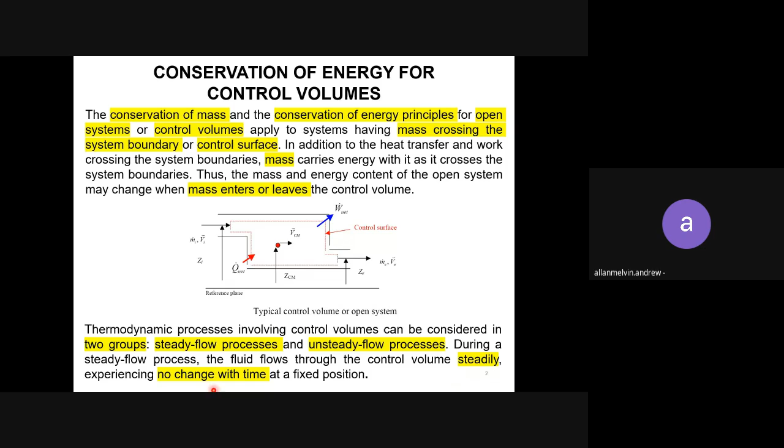An unsteady flow process means from point one to point two, within inlet to exit, you have a few points with different velocity or different mass entering. During a steady flow process, the fluid flows through the control volume steadily, experiencing no change with time. So if the flow is steady, meaning no change with time.

Let's review the concept of mass flow rate and energy transport by mass. One should study the development of the general conservation of mass presented in the text. So the first thing you need to understand is mass flow rate.

Mass flow through a cross sectional area. So mass flow rate is actually mass flow through a cross sectional area over time. Over time we are taking the integration. This is the formula.

So m dot, normally mass flow rate we will write as m dot, with the dot on top. Note that the dot over the mass symbol indicates time rate of change. So when you have a dot, it means it's related with time.

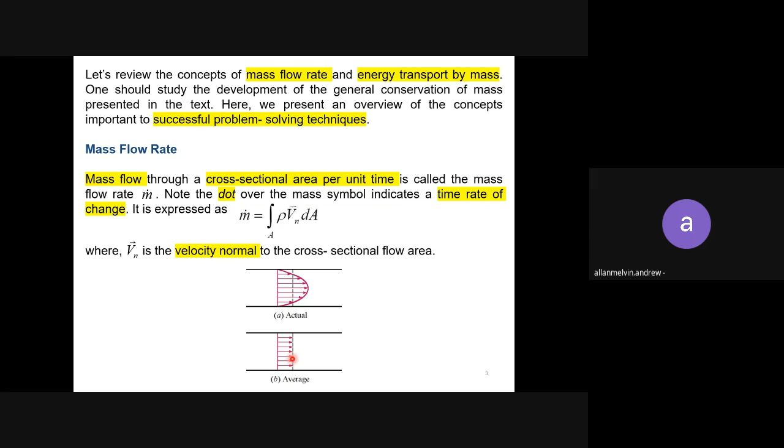You can see in the picture this is the actual velocity. How will the actual velocity be? The one nearer to the surface will be almost the same, it will be hard to move those molecules, and molecules at the middle will move more. So in the actual situation, the water or mass will be flowing in this way. But for calculation, we will take the average of all these lines, and then we get this. It's easier to do calculation this way.

So this is the formula. If the fluid density and velocity are constant over a flow cross sectional area, the mass flow rate is calculated by taking into consideration the average velocity, not the actual velocity. So m dot, our mass flow rate, equals rho times average velocity times area.

So you can use this formula or this formula, these are the same because this one is derived from this pipe.

Okay, so you can get this. Density is 1 over V, so you can convert it into this form, depending on the information given in the question. Later we will see a few questions, then you can understand how we can use this. I will give an appendix of formulas for your final exam. Some of the formulas will be appearing in your exam question at the appendix section.

The fluid volume flowing through a cross sectional area per unit time is called the volume flow rate. Earlier we saw the mass flow rate. So there's another thing called volume flow rate, which is the fluid volume flowing through a cross sectional area over time. The symbol is V dot. V dot, volume flow rate, equals to the average velocity times area. The relation between mass and volume flow rate is m dot equals to rho V dot, or equals to V dot over V, where v is the specific volume.

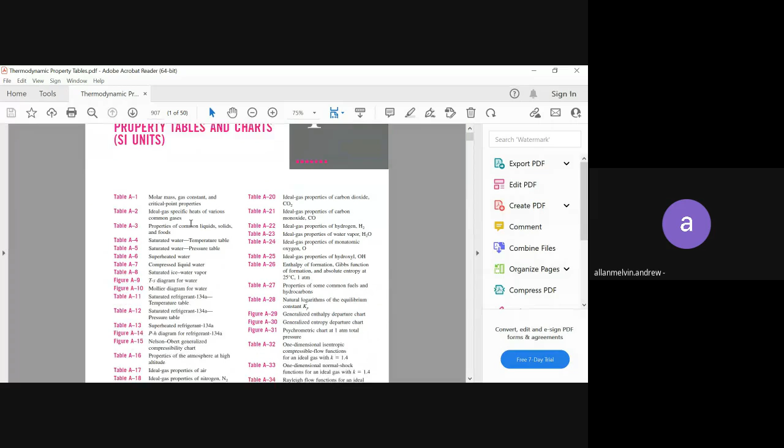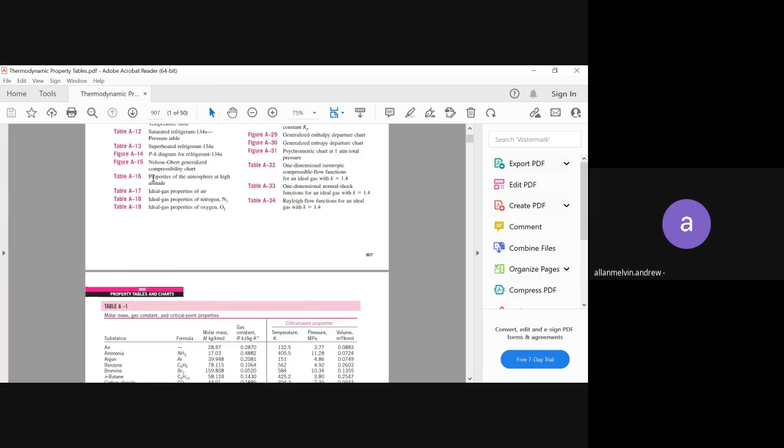This is your thermodynamic table. You have a few tables, so just find which one is related to ideal gas. Normally for ideal gas, we take from table 2, table A2. Not table A1, go to table A2. This is table A2.

Earlier we mentioned that it's air, and we assume air as ideal gas. If you want to find the gas constant, just go and find what is the value of R. In this table, for all the gases, you have the gas constant R, and also Cp, Cv, and K. In this case, we want to find the value of R for air, so the value is 0.287. That's how you can find it.

If the question mentions nitrogen, you just go and find the value of R, which is 0.2968. Normally we won't ask about weird gases, so it can be either air, carbon dioxide, helium, hydrogen, nitrogen, oxygen, or it can be steam. Steam also can be asked. For steam, the gas constant is 0.4615. So this is how you can check for the value of R from the thermodynamic table.

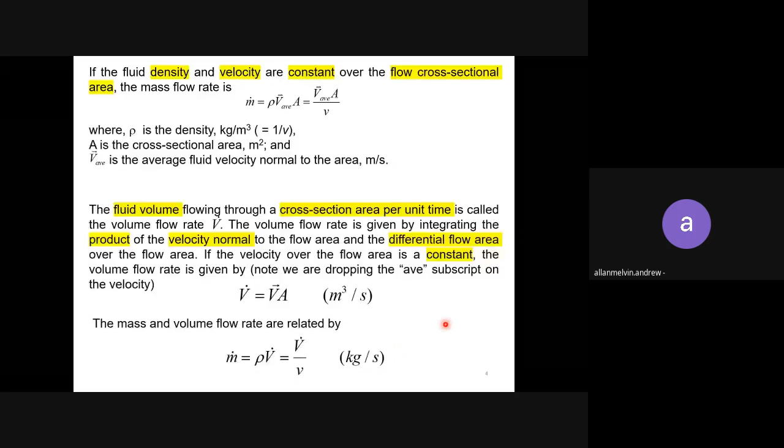But the question asks you to find the mass flow rate. So mass flow rate you take from this formula, the relation: M dot equals to V dot over V.

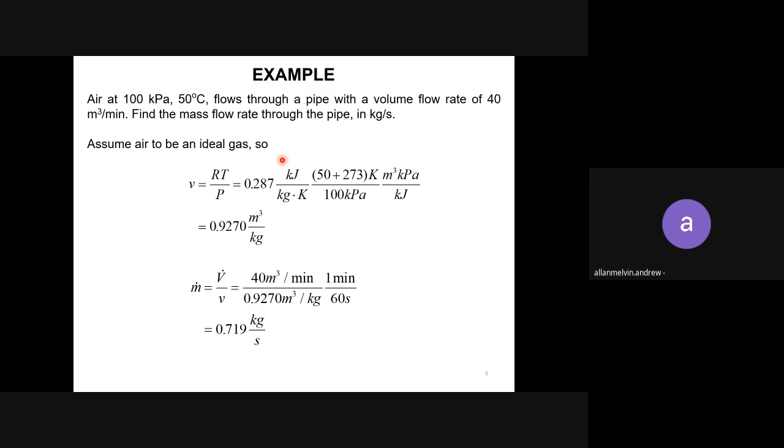So here we know that the volume flow rate is 40 meter cube per minute. And V equals to 0.9270. Once you solve this, this is the answer, 0.719 kilogram per second. So that's for the example.

So conservation of mass for general control volume. The conservation of mass principle is: sum of the rate of mass flowing into control volume minus sum of rate of mass leaving the control volume equals to the rate of change of mass inside the control volume. Or we can write it as: sum of mass flow rate in minus sum of mass flow rate out equals to the changes in the mass of the system.

Steady flow process means the energy conversion device operates steadily over a long period of time, let's say 1 minute, or it can be 1 second or 1 hour. So the flow rate is steady, meaning it's not changing. So the rate of heat transfer and work crossing this control surface are constant with time. It will be easier to calculate when the process is steady flow.

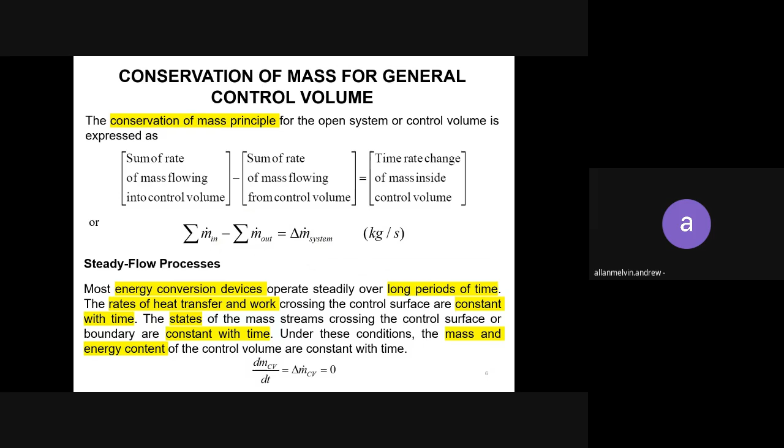In steady flow, based on this formula, there are no changes in mass, meaning the mass flow rate in minus mass flow rate out equals to 0. That's what is mentioned here. So when it's 0, finally for steady flow of mass, the equation becomes like this, because mass flow rate in minus mass flow rate out equals to 0. The negative part you bring to this side, so you get this formula: the sum of rate of mass flowing into the control volume equals to mass leaving the control volume.

And for the special case where the fluid is incompressible, the formula becomes like this: m dot equals to rho v dot. We call it constant density, so the density is not changing.

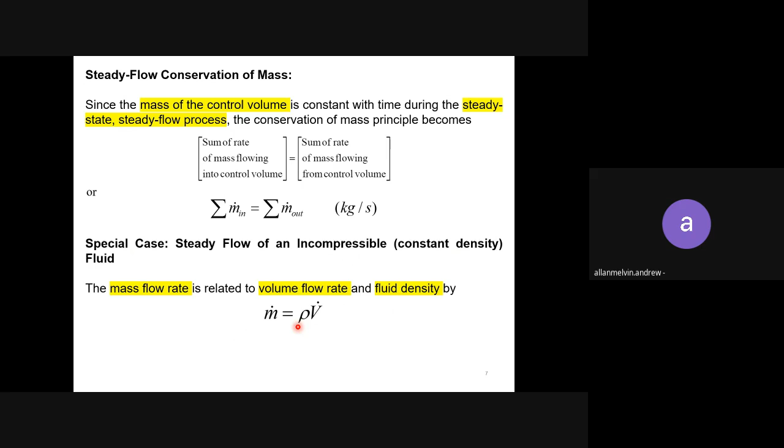For one entrance, one exit steady flow control volume, the mass flow rates are related as follows. There are some cases where there are only one entrance and one exit, like a turbine or a fan. So normally you only have one entrance and one exit. You need to evaluate from the question what kind of environment is given - is it one exit, one entrance one exit? If one entrance and one exit, the mass in and mass out will be the same, because whatever is entering will go out. So the amount of mass in and amount of mass out are the same, so you can have it like this.

Then the equation becomes rho in v dot in equals to rho out v dot out. This is for the incompressible assumption, where density will be the same, meaning density in equals to density out. So you replace here: rho in equals to rho out. Finally we will have volume flow rate in equals to volume flow rate out. You replace in the formula, you get: V in A in equals to V out A out. So these are the formulas.

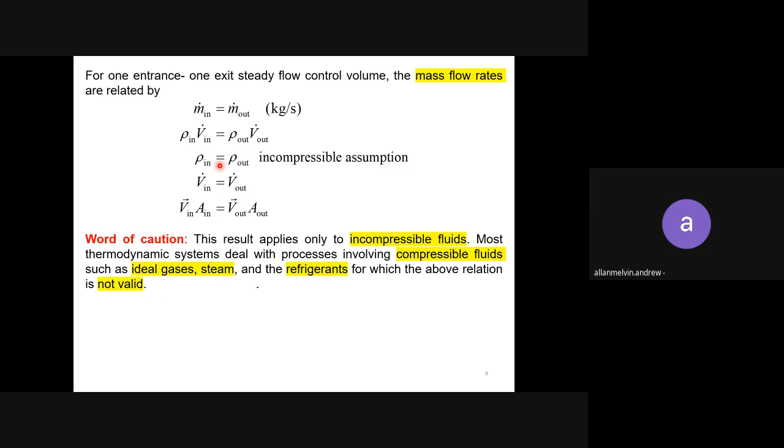Word of caution: this result applies only to incompressible fluid. Most thermodynamic systems deal with processes involving compressible fluid. If the question mentions it's an incompressible fluid, then you can use all this formula. But normally thermodynamic questions relate to compressible fluid like ideal gas, steam, or refrigerant - which are not incompressible fluid. All those are compressible fluid, so all this cannot be used. Now we'll see one example.

Okay, so the medium is air. Air enters a nozzle steadily at 2.21 kilogram per meter cube and 30 meter per second. It leaves at 0.762 kilogram per meter cube and 180 meter per second. The inlet area of the nozzle is given as 80 centimeter square. Make sure you convert it to meter square. So determine the mass flow rate through the nozzle.

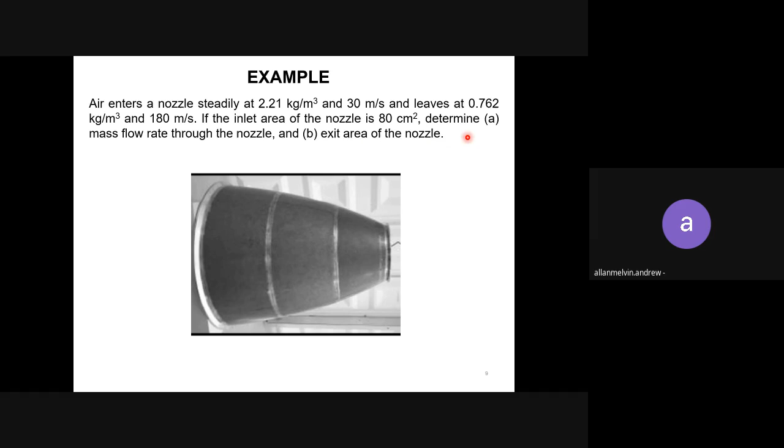You only convert if the question asks you to convert. Sometimes the question will say determine exit area of the nozzle in centimeter square. If it's given, then you need to give in that particular unit. If not, you can just stop until this side.

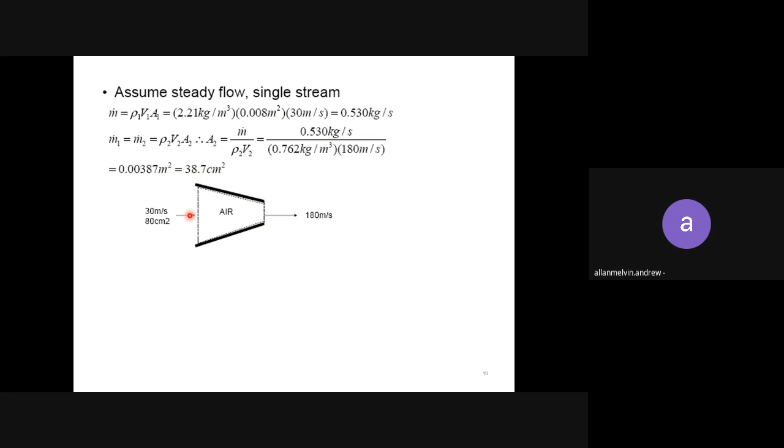So this is the sketch. The nozzle will be like this: bigger entrance, smaller exit. If you see here, the entrance earlier was 80 centimeters square, entrance is bigger. So exit is only 38.7, so smaller, and it will be like this. So that's for one example we see.

Flow work and energy of a flowing fluid. We have seen the mass flow rate, volume flow rate. Now we want to find the flow work, and the energy of a flowing fluid. We know work is related to force times distance, W equals to Fs. Meaning you need to apply a force to move one thing from one point to another point. So that is what we call as work.

And in open system, you have a system here. You're applying a force and it is moving from this point to this point, of a length of L. So we know that there's a work done by the flow because it's moving from one point to another point. Using that approximation, you can find that flow work.

Energy flow into and from the control volume with the mass. The energy required to push the mass into or out of the control volume is known as the flow work or flow energy. You need to apply a force to move the fluid from one point to another point in the control volume. The fluid upstream of the control surface acts as a piston to push a unit of mass into or out of the system. So this is the upstream, where the force starts.

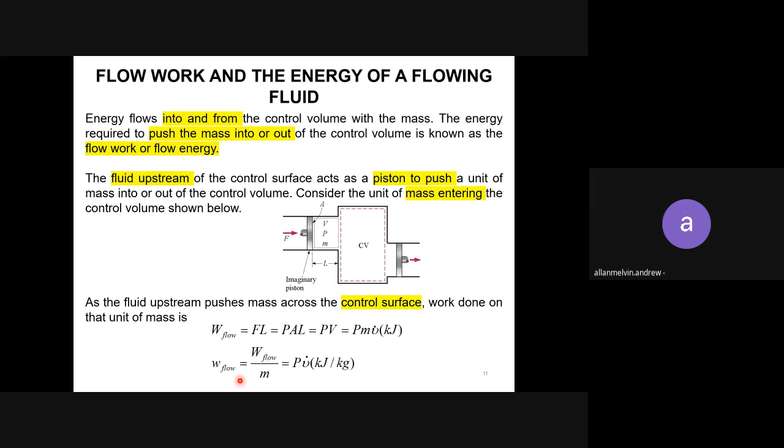So you'll have pressure times specific volume. These are some of the formulas you can use in your calculation. The term PV is called the flow work done per unit mass as it crosses the control surface.

So that's on the work. Then we can see about the total energy of the flowing fluid. So total energy carried by unit mass as it crosses the control surface is the sum of internal energy, flow work, kinetic energy, and potential energy.

I think this is from chapter 6. We know the total energy of a system is the summation of internal energy, U. Flow work is PV. Kinetic energy is V square over 2. Potential energy is Gz.

So total energy, let's say, is theta. So U plus PV, we know that is H, the enthalpy. This is also from the previous lectures, you can go and see. So U plus PV equals to H. So you can use this formula or this formula.

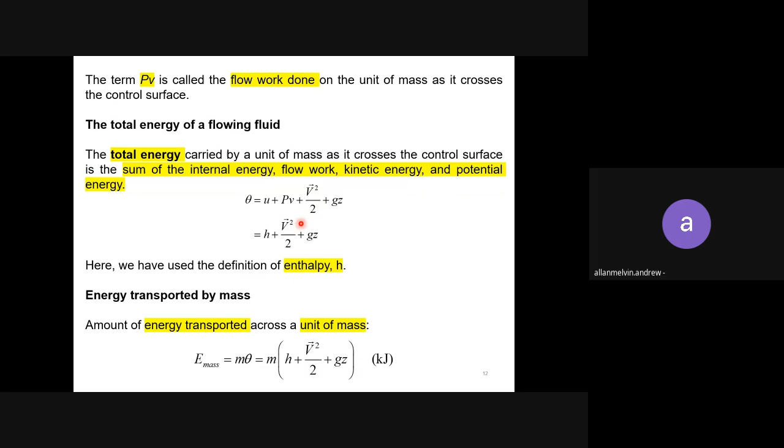And we also can have the form in the rate of energy, so rate of energy means per time. So E dot mass equals to m dot, and you apply the same formula. It depends on what the question asks. You have a lot of stuff related to open system. If the system asks to find the rate of energy, use this formula. If it asks to find the energy, use this formula. If it asks to find the total energy, use this formula. So it depends on what the system asks.

But in these slides, we are studying all the things available related to open system. Then we have conservation of energy. So if you want to calculate, you need to go through the conservation of energy principle in order to find some missing parameter. The conservation of energy principle for the control volume or open system has the same word definition as the first law for the closed system.

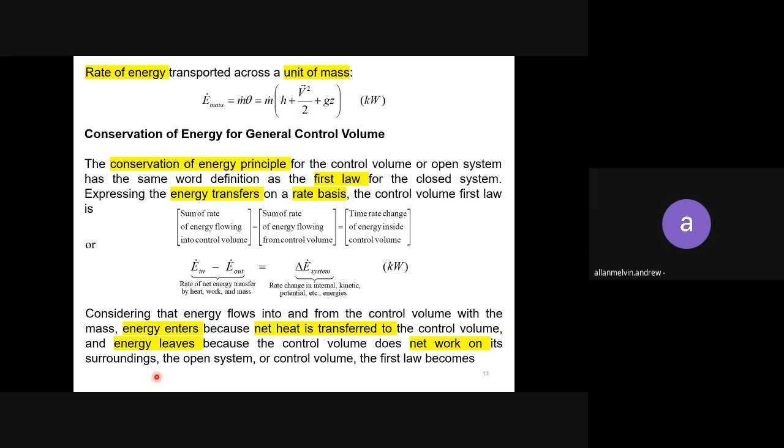So meaning rate of energy flowing in, E dot in, minus E dot out, the sum of rate of energy flowing from the system, is the change in the system. Considering that the energy flows into and from the control system with the mass, we know open system involves mass. So energy enters because net heat is transferred to the control volume, and energy leaves because the control volume does net work on its surroundings.

Open system or control volume, the first law becomes like this: Q net is added to the net energy transfer, Q dot net plus mass flowing in, minus work done by the system, minus mass out, equals to the change of energy in the system.

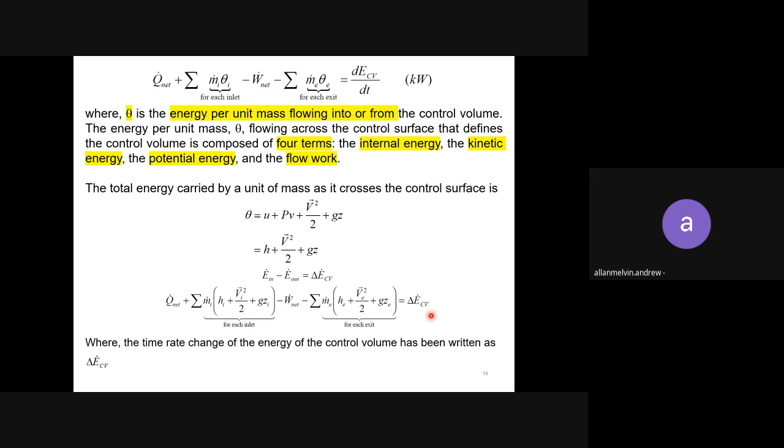So this is the previous formula: E in minus E out equals to the change of energy. So you can rearrange this, you can substitute. E in is in the form of mass in and also energy transfer, and E out in the form of releasing work and also at the exit. So you can find the change of energy in the system.

So we will study all the theory part first, then we will see a question for you to understand. So, steady flow conservation of energy: since the energy of the control volume is constant with time during the steady state, the conservation of energy principle becomes, since the energy is constant, the change of energy becomes zero. So you will have E in dot equals to E out dot.

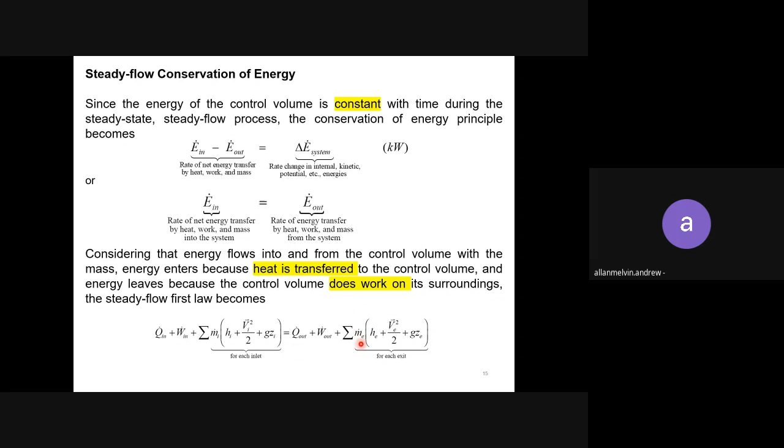Okay, so you can summarize. You just put this at one side, so you can get this formula. So it's all rearranging of the formula, from the previous derivations. Okay, so Q net dot equals to Q in dot minus Q out dot. W net dot equals to W out dot minus W in dot. So you can use this.

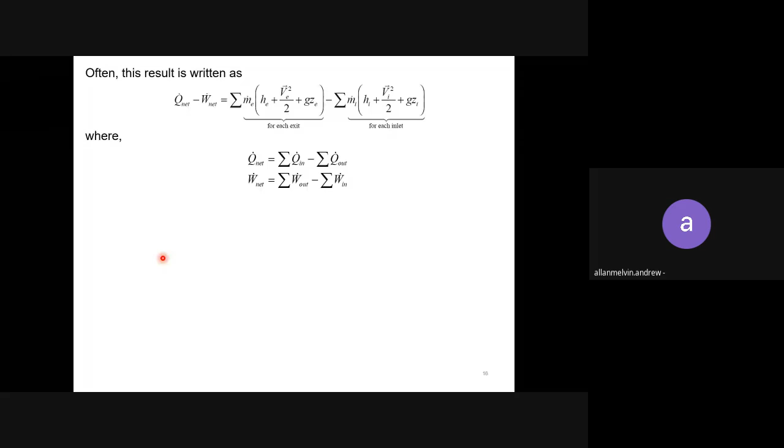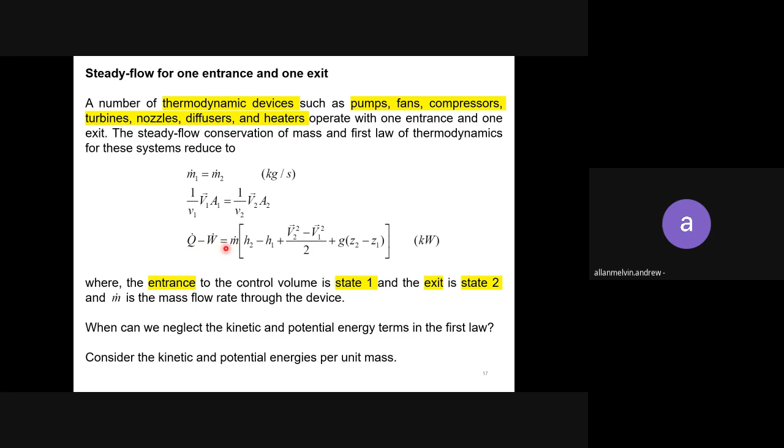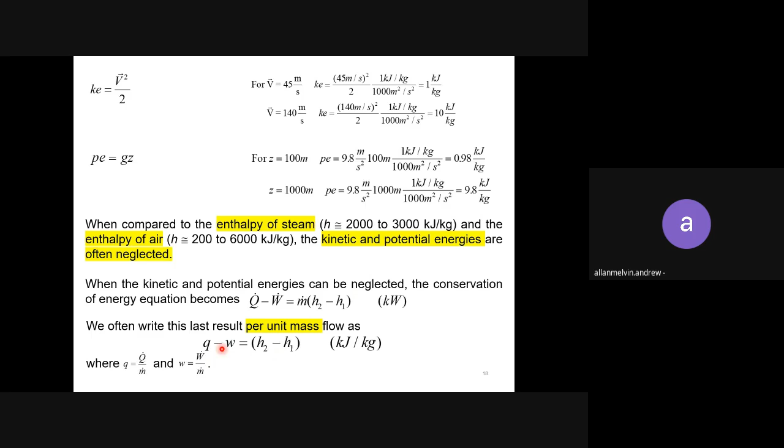So that's why you only get this formula, because the kinetic and potential energy becomes 0, from the previous formula. And per unit mass, you can write it like this. So these are some of the derivations that you can use, some steady flow engineering devices.

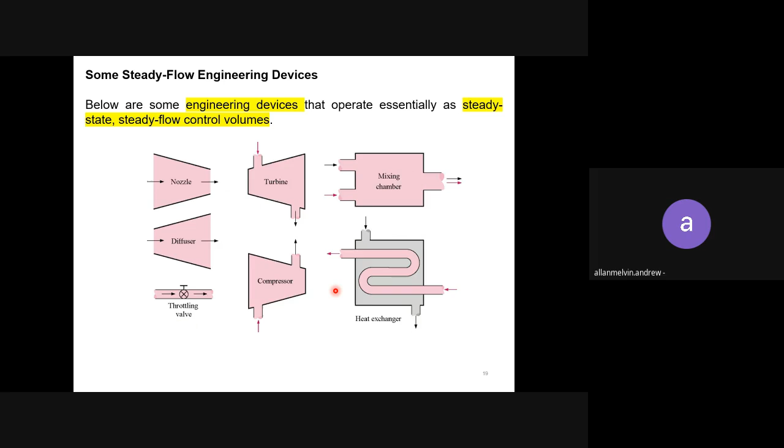So you'll see a few things about nozzle and diffuser. Nozzle we saw earlier, so a nozzle normally will be like this. For the first thing you need to understand, you see the area of the entrance and the exit.

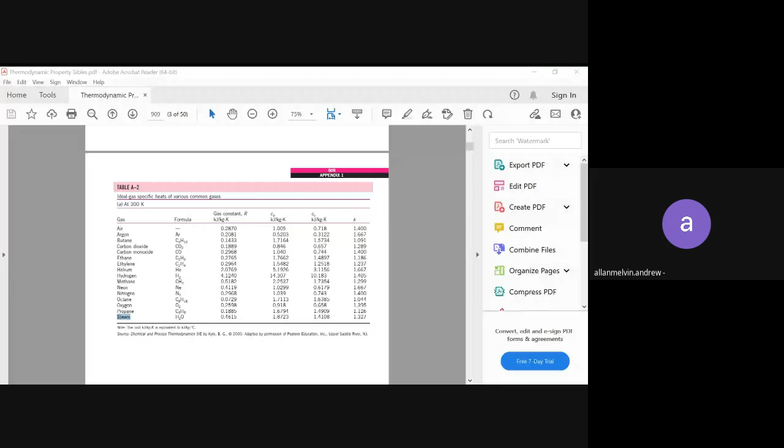So we go to the steam table. If it's related, I will give it in the exam question appendix. Okay, so you can see this table. First you go to the table of contents, and you find the superheated steam table. So where is it? So this is saturated water, superheated water.

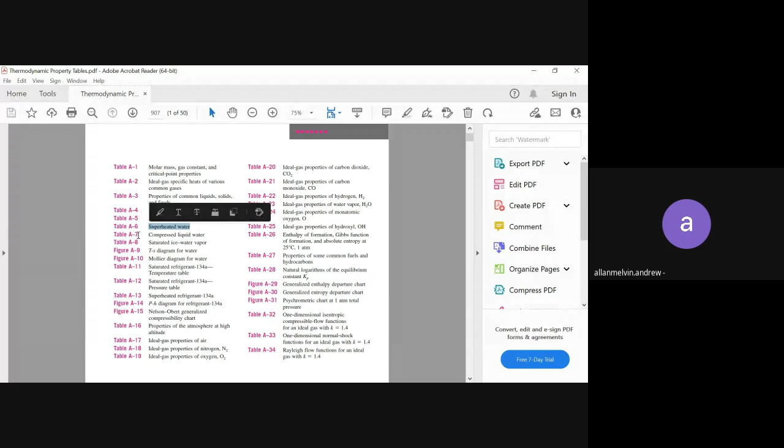Okay, table A6. So if other materials or superheated refrigerant, if the question says refrigerant 134a, then you can refer to here. For now, we are looking at table A6. So go to table A6. Okay, this is table A6.

So you have quite a long table. Table A6 starts here. Then from the question earlier, it says the temperature T1 is 300 degrees Celsius and the pressure is 0.4 million pascal.

So first you find, because the table is arranged based on the pressure, 0.4 million pascal, so you go find 0.4. So P equals 0.4, it's here. Then you find the temperature 300. So 300 is here, so you will take these values.

Okay, what do you want to find? You want to find the value of h. So you just take the value of h from here. So for 300 degrees and 0.4 million pascal, the H is 3067.1. Okay, so you already found 3067.1.

Okay, I'll show you back the question. So for 300 superheated, 300 degrees Celsius and 0.4 million pascal, H1 we already found from the superheated steam table. So H1 equals 3067.1 kilojoule per kg. That's for the first part.

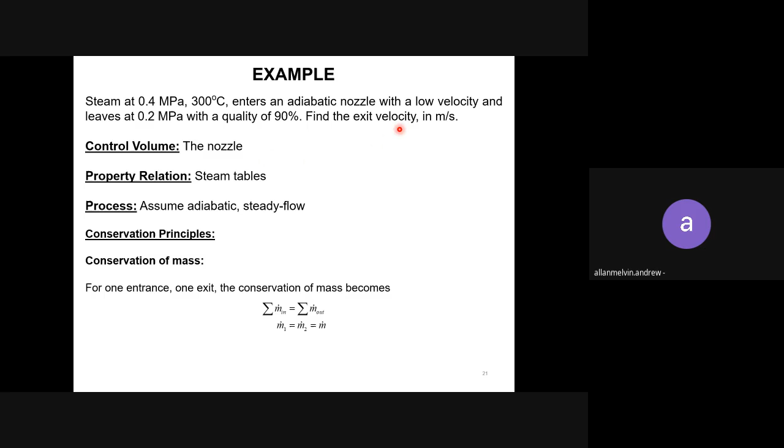Then the question asks to find the exit velocity in meters per second. So exit velocity is V2. You use this formula, since you already know the values of H1 and H2, so it's easier to find V2.

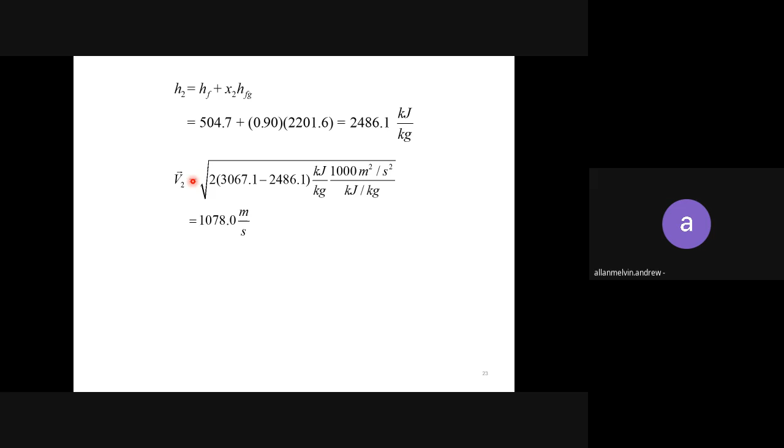So 3067.1, this is from this part, minus 2486.1, from here. After unit conversion, the value of V2 is 1078 meters per second. Okay, so this is how you answer the questions related to this part.

Okay, we'll see one more example. The question says this is refrigerant 134A. Refrigerant 134A is normally used in air conditioning or in the fridge. So it depends, let's read the question first.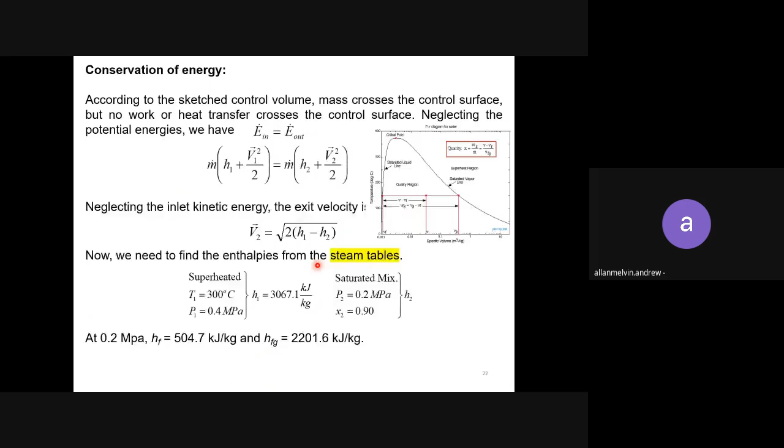So we know for nozzle, we automatically follow because it's a nozzle. We will just take this formula.

Okay, you rearrange the formula. You just bring everything to one side. Then M and M you can cancel. Then you rearrange, bring all this to this side, so you can get the formula in this form: 0 equals to H2 minus H1 plus V2 square minus V1 square over 2.

Okay, so you already got this. Now you want to find the value of H2 and H1, so you need to see from the property table. As mentioned here, the table A13. Okay, so we will try to check.

Okay, sorry that I need to shift a few times. Okay, table A13. As you can see here, table A13 is superheated refrigerant-134a. So you straight away can know from the type of substance and also the process.

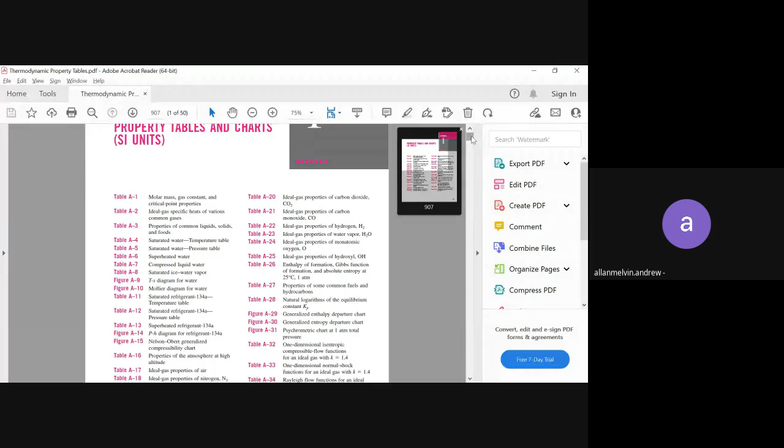So the property is superheated, so we know that we need to refer to table A13. Just go to table A13. Okay, so this is table A13. Okay, refer back to the information given: P1 equals to 700 kilopascal and T1 equals to 100 degrees Celsius.

700 kilopascal is 0.7 because this is in megapascal. So just go to 0.7. Okay, so 0.7 is here. And the temperature is 100. So all these parameters can be involved.

So what do you want to find? You want to find the enthalpy. So enthalpy is H. H is 338.4.

So you want to find V1 also, the volume. Okay, so you can get two information here. H is 338.4 and V equals to 0.040642. So two things that you can take.

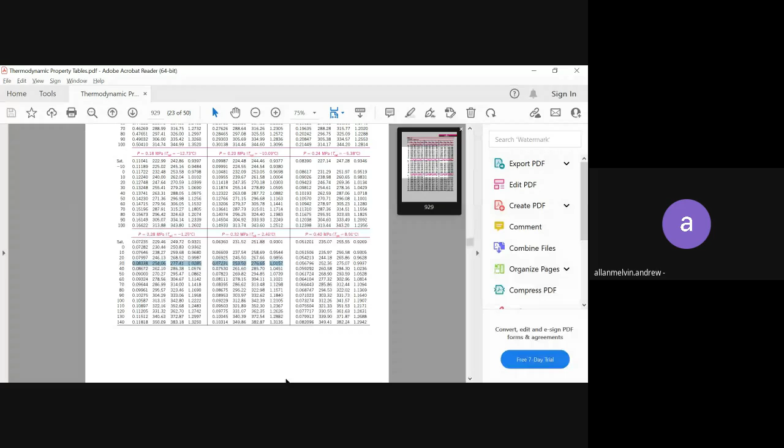Okay, so here I think they refer to another table, so you get 274.7. It's okay, but it will be almost the same. Okay, so this is how you read from the thermodynamic table. Okay, so I go back.

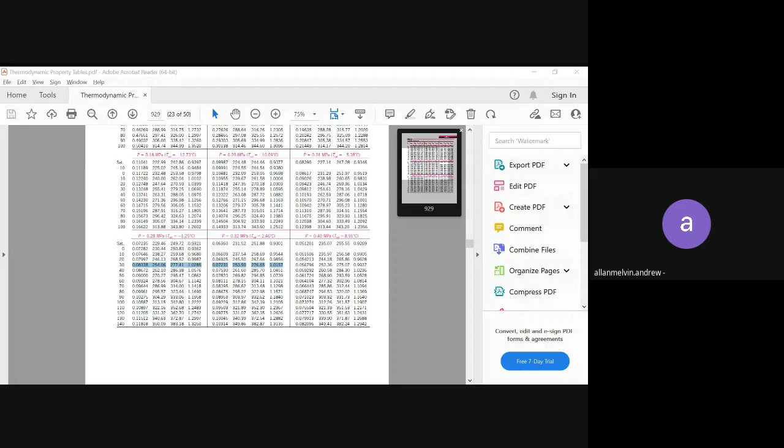Okay, so these are the information that we got earlier from Table A13. So V1 equals to 0.04064 and H1 equals to 338.19.

Sometimes the values might be a bit different depending on the thermodynamic table that particular company generates. As long as the values are almost the same nearby, we still can accept it.

And for the second part, V2 equals to 0.07767 and H2 is 274.7.

So you already got these two values, then you can replace it in this formula given here. So H2, 274.7 minus H1, 338.19, plus V2 you want to find, minus V1. 20 is given in the question, so velocity is 20 meters per second, and V1 is given over 2.

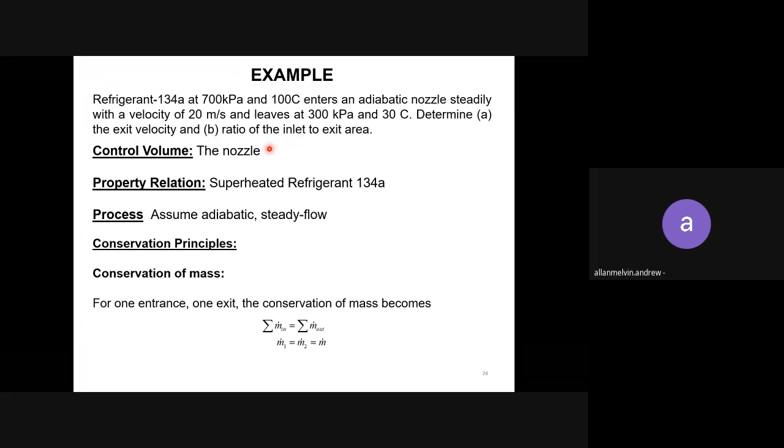Now we want to find the ratio of inlet to exit area, A1 over A2.

The smaller V is the specific volume, and V1 equals to velocity. So don't get confused.

So you replace the values. You get the ratio, which normally won't have a unit. From here you get the ratio is 9.34.

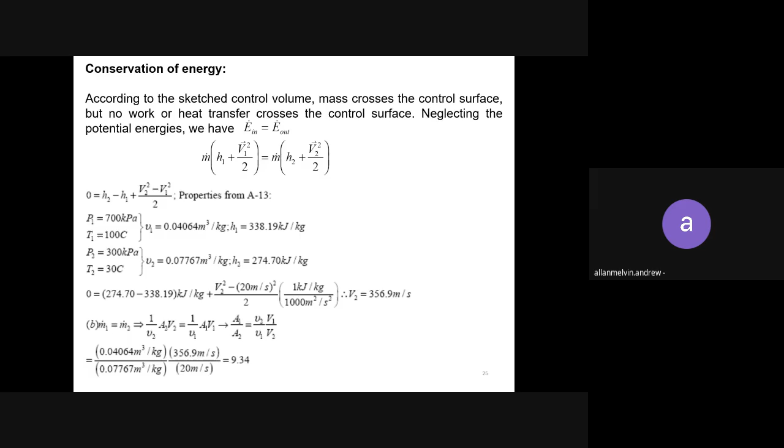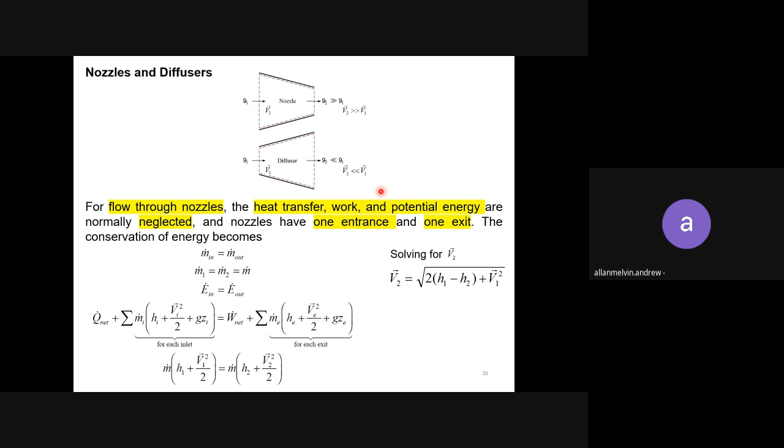So that's for the nozzle. Now we go to the turbines. For the nozzle, the opening area will be more and the exit area will be less. For the diffuser it will be the opposite - the entrance will be small and the exit will be bigger.

Turbine drives the electric generator in steam, gas, or hydroelectric power plant. Most power plants in Malaysia use hydroelectric - water power, wind power, or steam power. It can be in the form of steam or gas, or you can use hydroelectric power plant.

In order to generate electricity, inside there we have a turbine. So the flow will rotate the turbine. The electricity is generated as the fluid passes through the turbine, work is done against the blade. So when the flow is entering, it will rotate the turbine and work is done.

Which are attached to the shaft, so it is more on the rotational work. As a result, the shaft rotates and the turbine produces work. So inside the turbine, when it rotates, if you move from one point to the second point, meaning work is done.

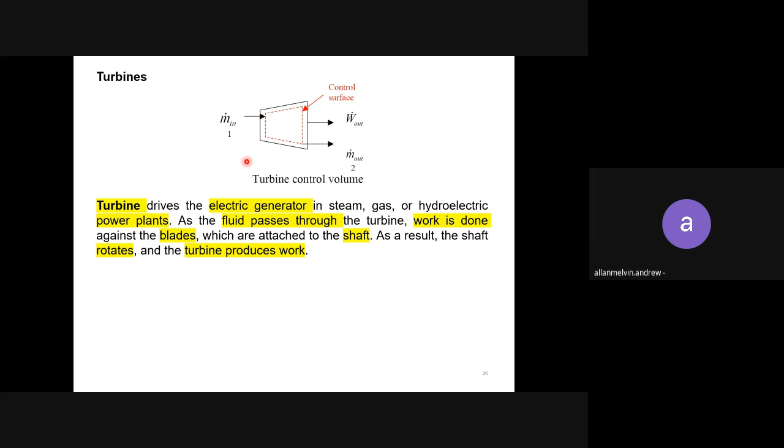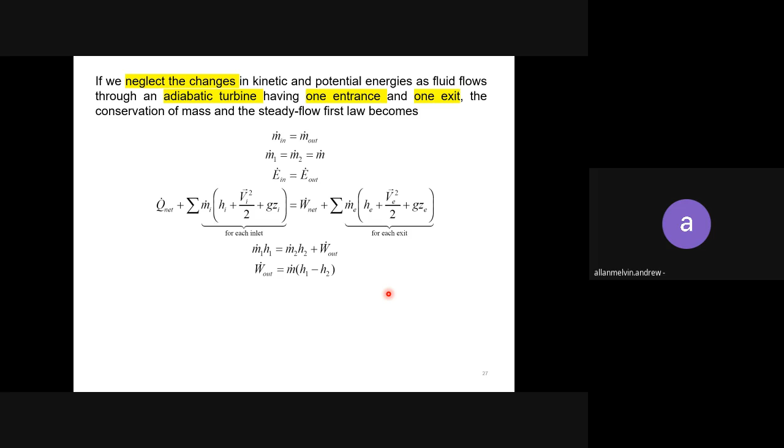These are the formulas that we can use. I don't give an example for the turbine here, but it's similar to the nozzle. So end of chapter 8 part 1.